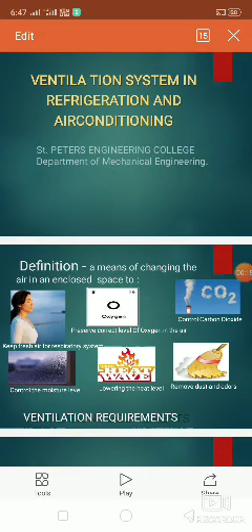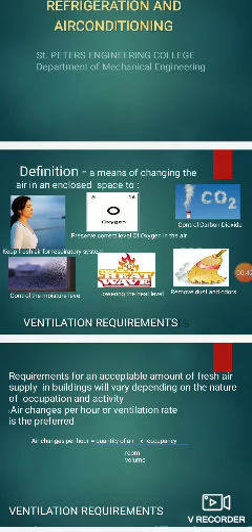Definitions: A means of changing the air in an enclosed space to keep fresh air for the respiratory system, preserve correct level of oxygen in the air, control carbon dioxide, control the moisture level, lower the heat level, remove dust and odors. For this purpose we require a ventilation system. These are the main purposes for which we use a ventilation system.

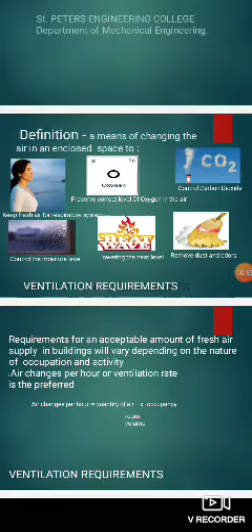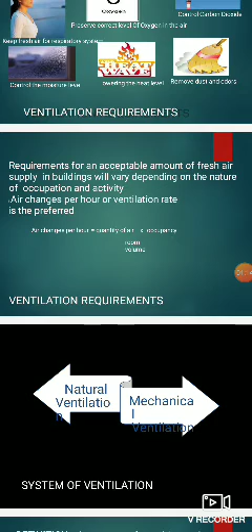Coming to the requirements for an acceptable amount of fresh air supply, in a building it will vary depending on the nature of occupation and activity. Air changes per hour, or ventilation rate, means mass flow rate is preferred. Air changes per hour equals quantity of air into occupancy, divided by room volume. This gives us the air changes per hour, or ventilation rate.

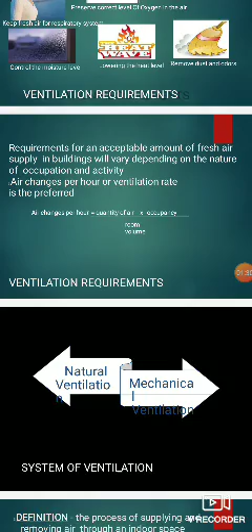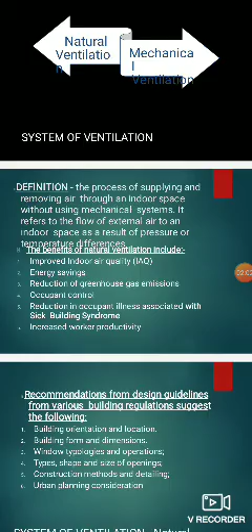Now, coming to the systems of ventilation, the proper definition is: the process of supplying and removing air through an indoor space without mechanical systems. It refers to the flow of external air to an indoor space as a result of pressure or temperature differences. Because of pressure and temperature differences, the flow of air inside a room, inside an enclosure, inside a space is decided, and that relates to the quality of air.

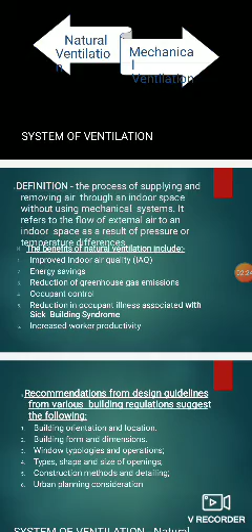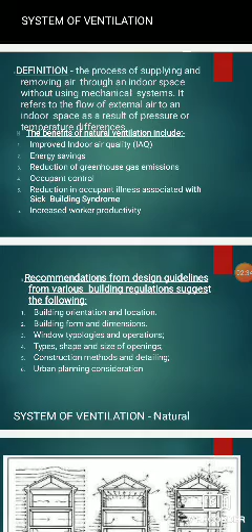Now, the benefits of natural ventilation include several topics—just go through this—and recommendations from design guidelines from various building regulations such as the following. Just go through these things.

So what is this? Building regulations such as the following: the building orientation and location. Yes, absolutely—depending on orientation, the atmospheric conditions will also change. That's why this point comes first.

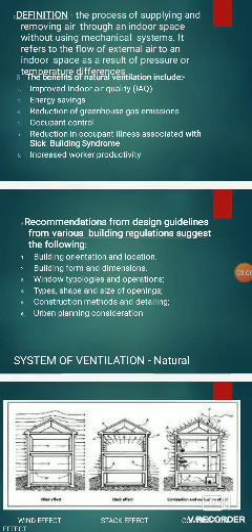Next, building form and dimensions, yes absolutely. According to the geometry of construction, different dimensions of the building construction require different ventilation methods, and the flow rates may change, and the quality of the air may change.

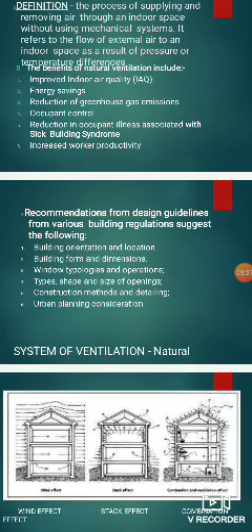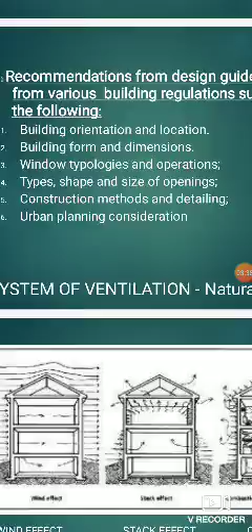Next, window typologies and operations—types, shape and size of openings. Depending on this also, the air conditioning and ventilation will depend. Next, construction methods and detailing. Urban planning considerations will also come under consideration. So these six are the recommendations for design guidelines from various building regulations.

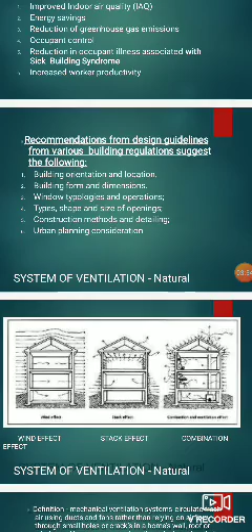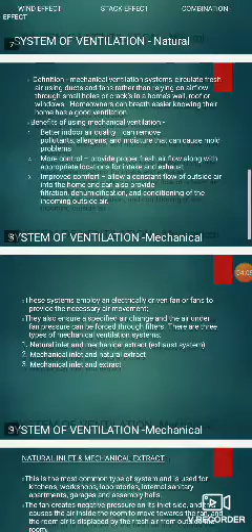So this is also an important factor for the need and requirement of a ventilation system. Now go through the system of ventilation in natural methods. We have small definitions for it, and the types of ventilation. To supply the air we require fans, and the purity and quality of the air is also an important factor.

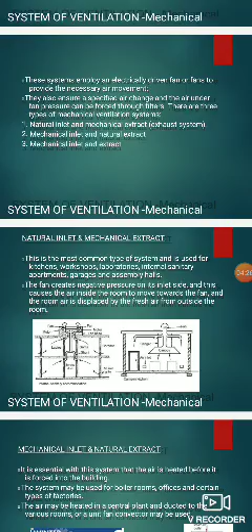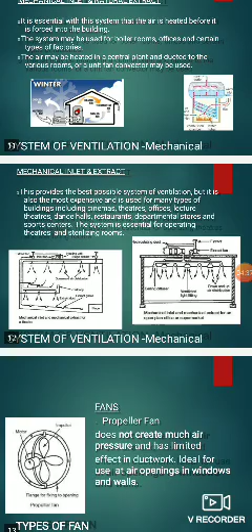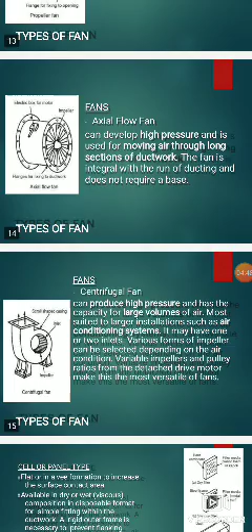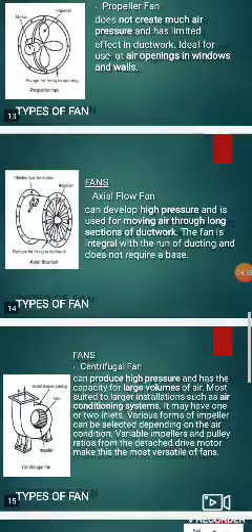That is also discussed in this PPT—inlet extract, mechanical inlet and extract. Now see the fans, there are some types of fans: propeller fan, axial flow fan, centrifugal fan, and cell or panel type. There are different types of fans that we should know. Mostly in industries we find the centrifugal type of fan, observed in general industries or factories.

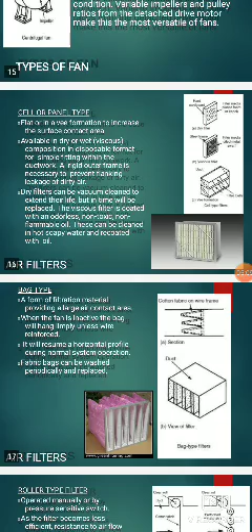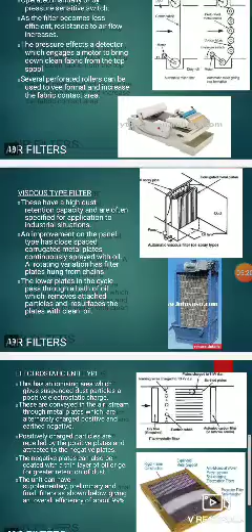Now, coming to air filters: to maintain the quality of the air we require air filters. There's a bag type air filter, a roller type air filter, a viscous type filter, and electrostatic unit type. The electrostatic unit type is an important thing, found in general industrial types. For better quality purposes we use electrostatic unit type air filters.